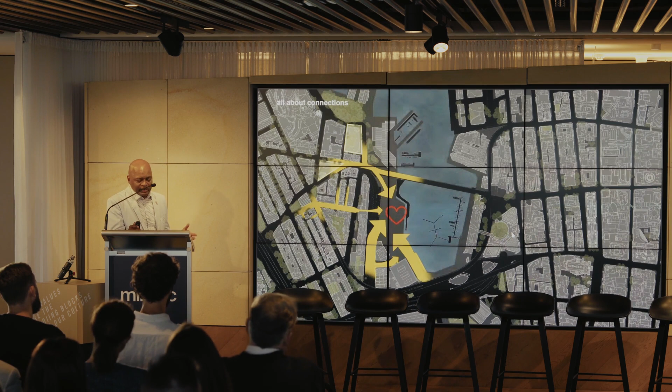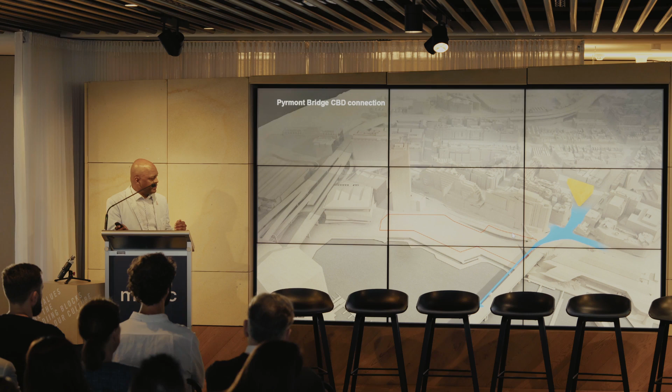In its contemporary setting, we think this is a place of great connection, facilitating various movements across the site. The proposed metro station will increase the amount of foot traffic across the bridge. It will also have a desired line across the site going towards the harbour. On top of that, you get a through-site link that will split the building into two.

We've used this network of design lines, view corridors, and pedestrian connections to carve, shape, and form the podium. This resulted in a series of interlocking floor plates that slipped in and out, which was a really good device to break down the mass of the massive podium.

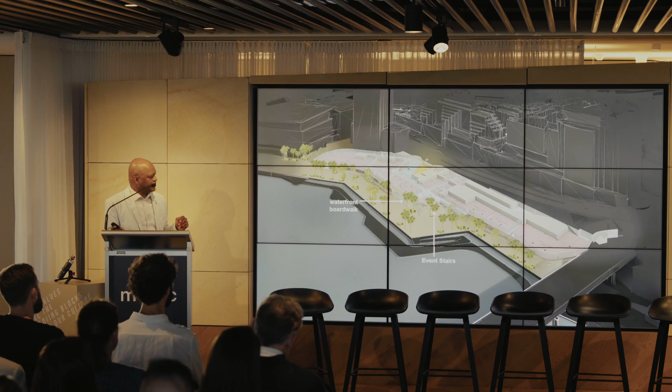The ground plane has a whole lot of F&B activities, a stage in the foreground, a campshed, and even a stair that took people up to it.

Guardian Square is the prime public space in the proposal. It engaged the Pyrmont Bridge to the west and flowed down gradually towards the event stair. It also linked this view of the Guardian Square with the F&B flanking the western side.

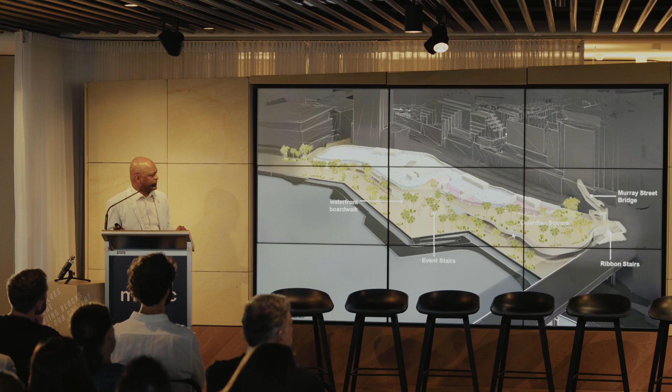So the Guardian Square is a prime public space. It's gently sloped towards the event stairs to the south, and it linked in with the Bunn Street connection and the through-site connection.

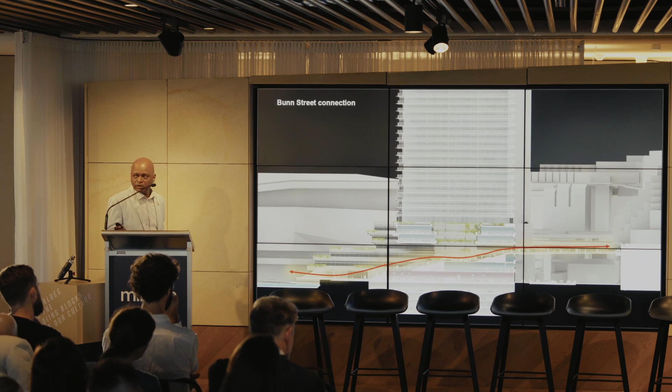The Bunn Street connection is dominated by quite a generous landscape stair itself. It's quite wide, almost like a people stair, bringing people from the high position back down to the water's edge.

So we have the through-site connection. It's almost like a third space - you're not part of the Guardian Square or the waterfront promenade, but you could hang out here. It also had a connection back to the lobbies of the commercial and apartment entities, with a large opening at the top that brought in a lot of daylight.

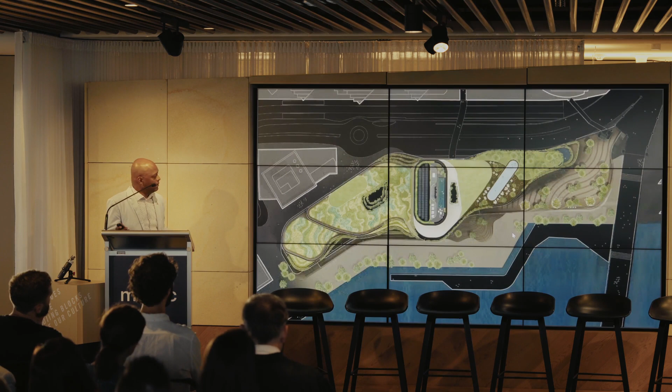The podium rooftops were landscaped with wetlands, and when you look down from above, it looked like a giant block painting.

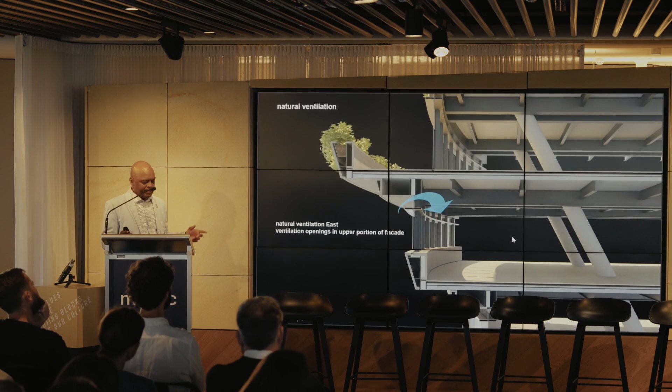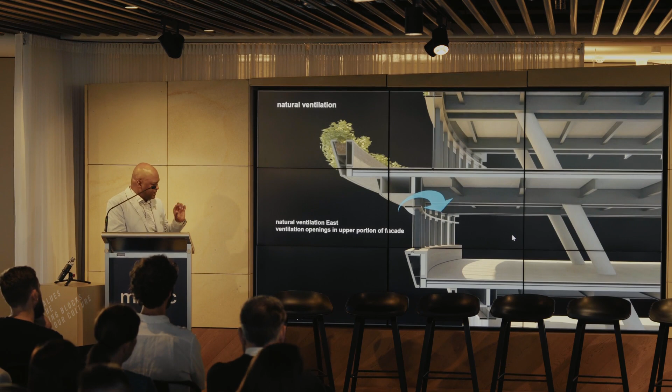The podium facade is very much about being an anti-CBD typology. We wanted it to feel like a landform, and solid sills create a really good, elegant horizontal articulation.

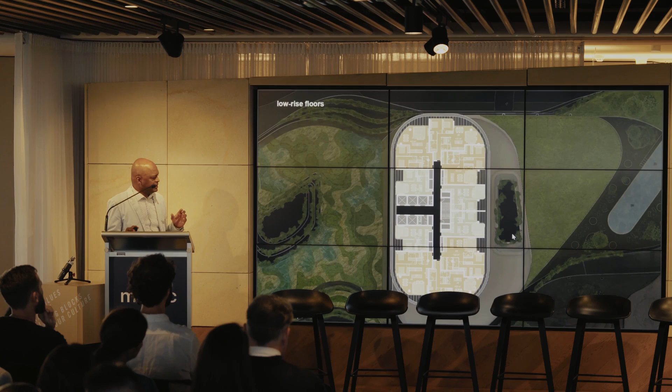View from inside out, and the tower itself - we were looking for an elegant and uniform tower, and we settled on a symmetrical floor plan with wraparound balconies and soft edges on the sides. The edges of the balconies projected out by 600mm to cater for PV cells.

Given the prime real estate is to the north, we pushed the core to the south, and as we went up, the lifts dropped and the area of the apartments increased.

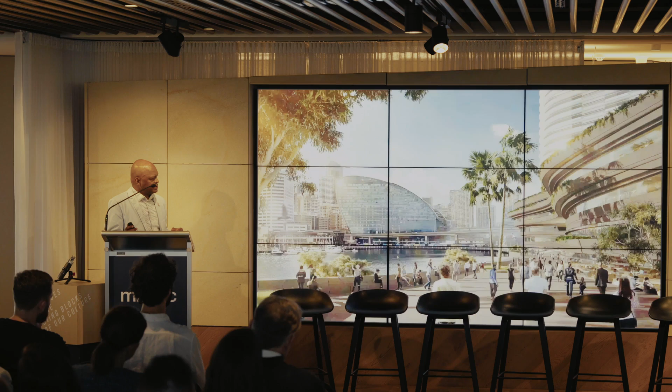And the top of it had a roof garden and a pool. I'll conclude the presentation with some of the renders that we did.

With a through cycle coming down from south to north, and from the bridge - I've seen that bridge before - and the last image of the tower shimmering in the skyline.

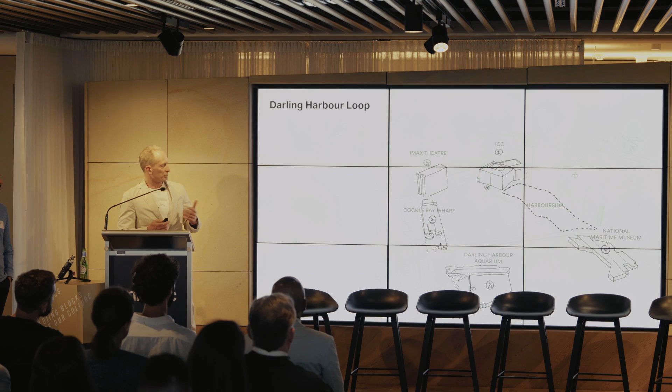I think the idea we explored was, can the site work for the community beyond its boundaries? What we investigated in terms of looking at the open space connections was that the Pyrmont side of the city is actually poorly provided in terms of accessible open space. So there's an opportunity here to reach beyond the site itself and make a public gesture, providing a set of parks and open spaces that knit and connect the site to the city.

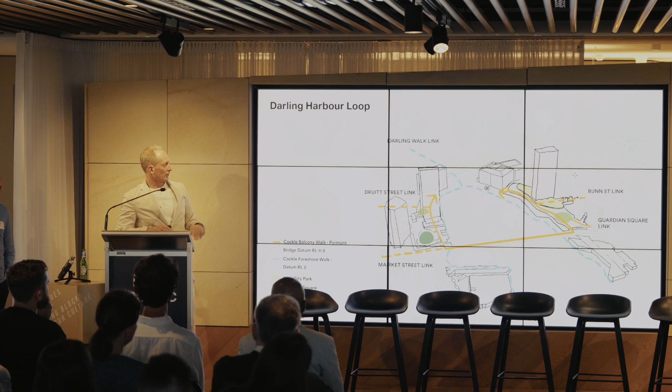One of the big urban framework gestures is quite simple: we already have a well-established ground level waterfront promenade connection, but by stitching the Cockle Bay project across Pyrmont Bridge and on top of the roof of the project, we're able to provide an upper level connection. So it complements the ground level pedestrian connection to Darling Walk. So there are two levels that you could experience Darling Harbour from, as an urban gesture.

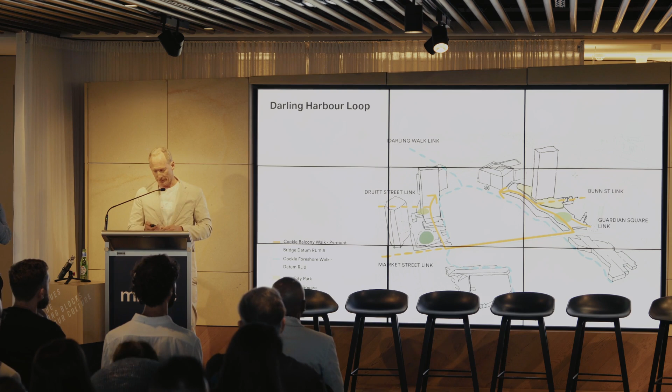The concept of the floating gardens was really a response between architecture and landscape architecture, to create a podium that was cut into a series of pieces. The pieces were cut to allow light and air into the podium, to break the bulk and create interesting moments that stitch the site back to the east and west. Interestingly, these levels as they change created this idea of floating gardens. So it was a very simple concept.

Then what we wanted to do was to knit the floating gardens so that one could walk from pedestrian level or a promenade all the way up over the roof and down the other side, making this incredible journey stitched into the site. And then the park itself was a series of floating gardens arranged to complement the ground level, if you like. Fred.

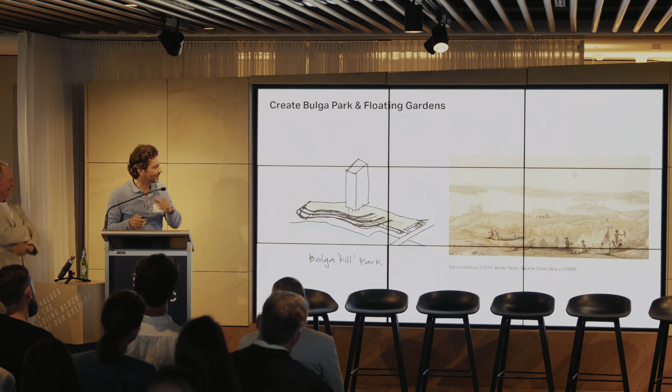Thanks, Adrian. Actually, Adrian, this is you again. Adrian took the concept discussion, but he said it better than I would have. So I think you're up again, Adrian.

What we wanted to do is recreate this bulga, the hill, using the gibber of country, and then stitch this wonderful journey that navigates all of the different floating garden levels. A very simple idea, if we all know about the 4 seasons in European culture, but the Aboriginal 6 seasons was the idea that underpinned the floating gardens.

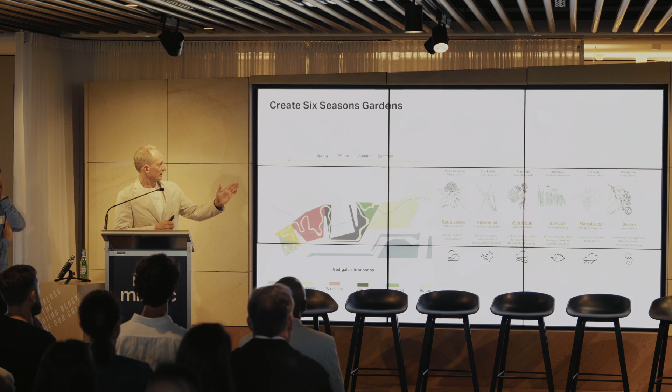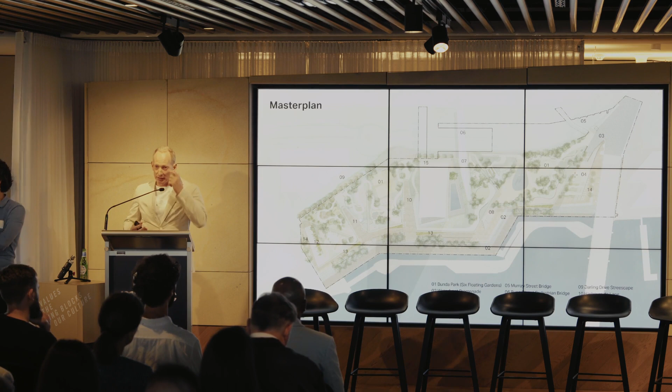They moved from summer, the northern part, which is receiving the most sun, all the way through autumn, winter and spring, picking up those gardens as they move across the roof. So we were able to create this wonderfully connected, publicly accessible set of bulga park and floating gardens that stitch the whole site together.

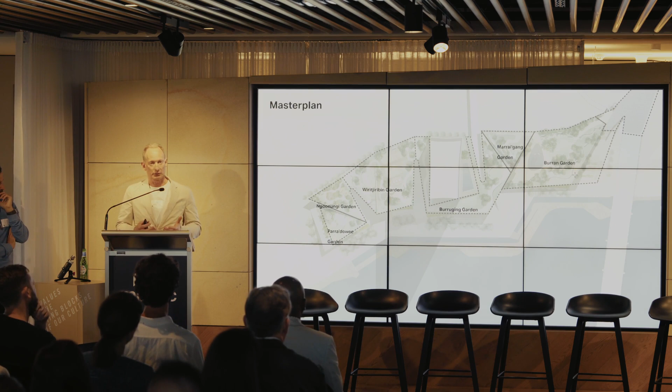Importantly, it's publicly accessible. Residents could still use facilities around the base of the tower, but there's a publicly accessible set of floating gardens that make a contribution to the city, into Pyrmont and beyond. So it's a very public and very wonderful set of propositions for the existing neighbourhood.

Fred. Adrian said it all, so I'm just going to go through this very quickly. I think we have 30 seconds. But well done, Adrian. As Adrian mentioned, we wanted to make it publicly accessible.

We felt there was a dearth of green space in the area. Of course, Cockle Bay is being developed by our good friends at Henning Larsen, and there's a green space. We're echoing that urban landscape in terms of accessible roof.

It was really important for us to break the scale of the overall building by having these indentations, which Adrian so eloquently said, allow daylight deep into what would be the office space.

We broke the facade into essentially 3 or 4 horizontal datums, which start to talk about the striation of the site, that have a vertical orientation to handle the low east and western sun. These indentations actually separate the office into manageable 1,000 to 1,200 square metre floor plates.

Through site link, as discussed previously, it was really important to make the site quite permeable, taking that public domain in and through rather than just water facing. All the lobby spaces were towards the west to help activate that edge.

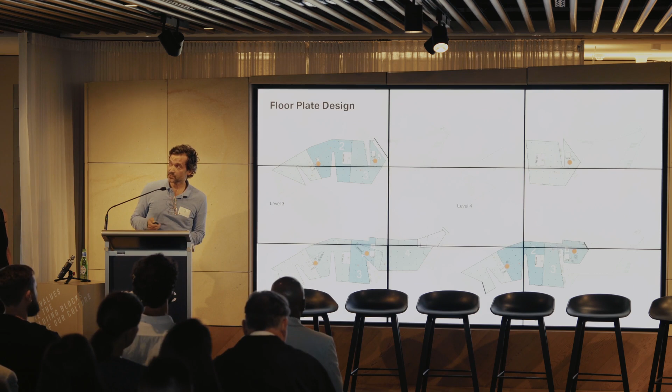Again, those indentations help us create these manageable office spaces to create a variety of potential anchor tenants. The indentations also help bring daylight deeper into this deep floor plate. And then of course, the options to have a loggia or an operable facade for covered outdoor terraces.

3XN, we always care about flow and program and how those two things mix. So the main entry arrival moment became very important, accessible from Guardian Square, that arrival moment where you're introduced to this green space and then taken out of that typical public realm.

So I think we're well and truly out of time, so just very quickly, extrusion. We started with the extrusion of the residential tower, moved the core towards the south, maximising the amount of light coming to each of those spaces.

Inherently in the apartment mix, we had a bit of a play articulated within the facade. We extended those floor plates 1.5 metres to try and maximise the available outdoor space. It's such a beautiful setting.

Articulated that with this waveform, sort of nodding to the peals of the podium, but also the setting that it's sitting within. It articulates each one of those apartment blocks, but it's also able to work within any apartment mix. So it's just creating that sort of play.

We pulled up the balustrade, that allowed us to block the westerly winds and sun, as well as maximise views out to the harbour. And that's how it plays out along the facade.

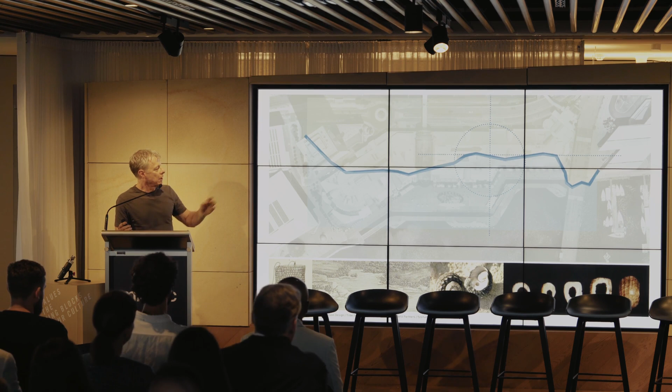In thinking about this site and casting our minds back to what it was before settlement, we realised there is the original shoreline, and perhaps the opportunity to interpret that edge and understand the reclamation of land, and in some ways create an experience of recollection.

We worked quite closely with Shannon and Martha on this idea, and you can see how that drops down into the shore and creates that sense of an edge and a strong landscaped presence. Part of that, of course, is the presence of the Port Jackson fig, the dominant tree.

This little section shows how that landscape flows down and is actually interpreted in this building that sits at that important junction, which you can see there.

It was a building conceived that we worked on quite closely with Shannon, that could free up the ground, but within it—and there's a lot of retail in this project—there could be First Nations focused exhibition, retail, food, design and produce.

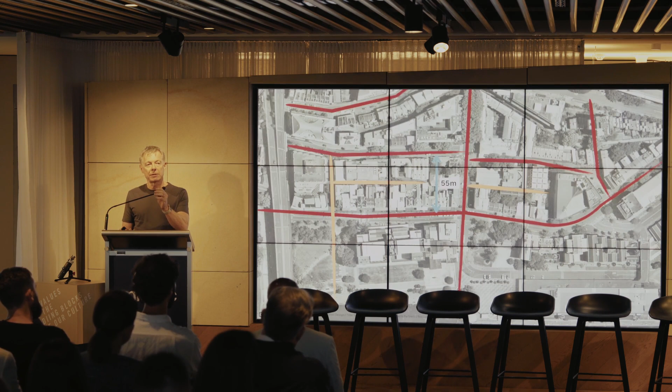But also in thinking about areas of intense waterfront redevelopment and Darling Harbour, there was a step back to think about how we structure the urban form at our waterfront.

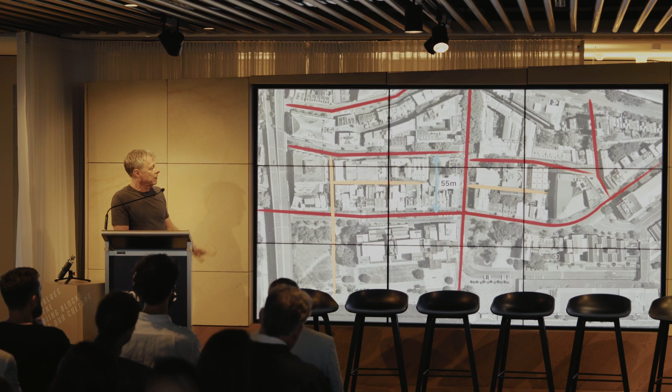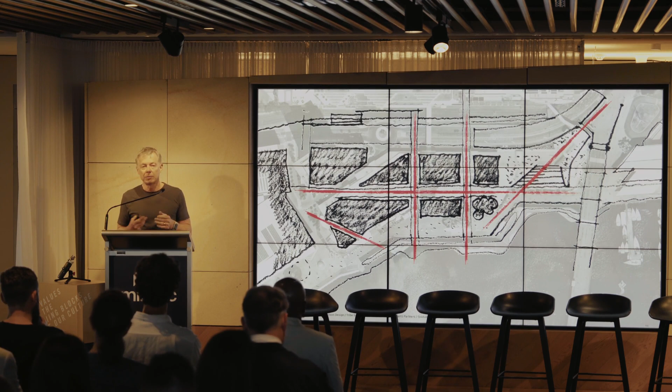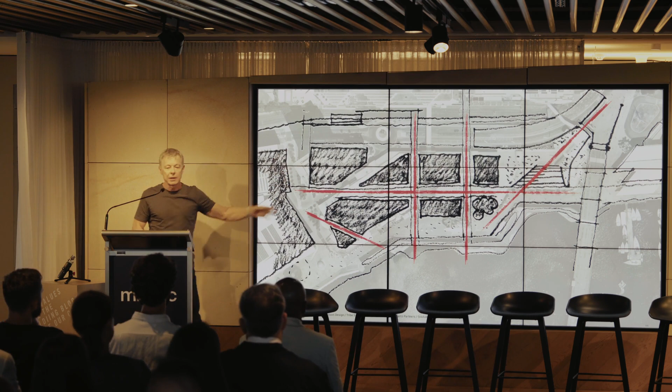To actually bring these different geometries through into public spaces that already exist, and to give a sense of the Pyrmont grain coming through to the shore.

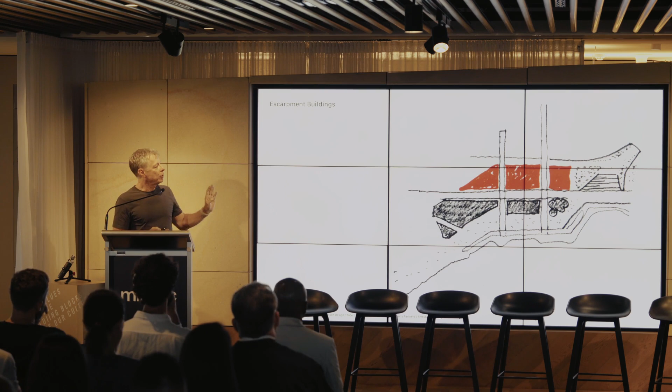So then the buildings to the west of that line, we conceived of as a kind of escarpment, that those podium buildings could be a reinterpretation of the sandstone escarpment.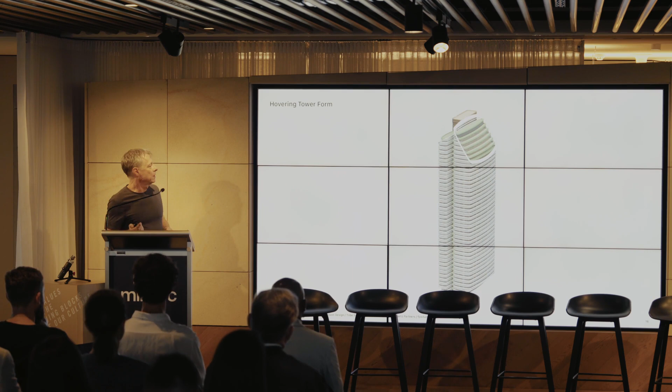And the tower then was conceived as something quite separate that could be conceptually floating above this platform. It's got a lot of really well designed apartments in it.

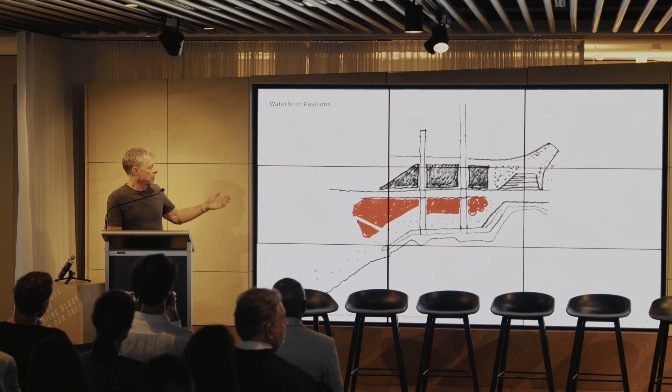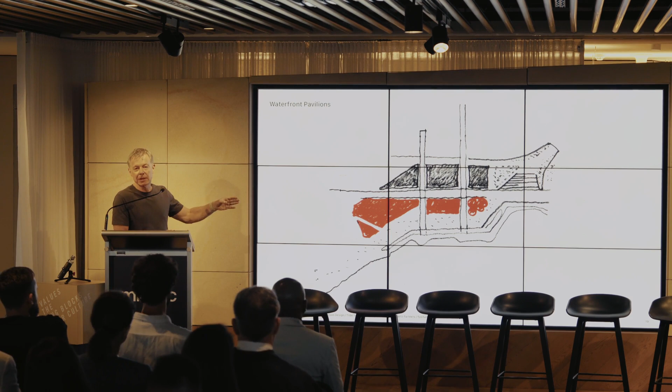Very rational core. And then when it came to the balance of the buildings that are less integrated in the tower, we thought that this should be the work of other architects—that will make a city like this, not just by ourselves, but with other designers. So we got in contact with some friends of ours, and each of them worked with us to design these buildings.

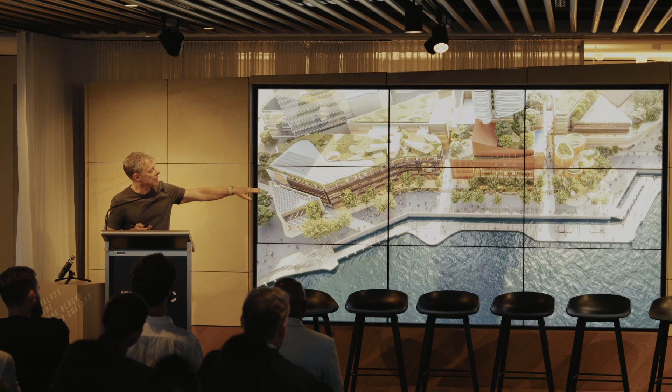Looking down, you can see that grain coming through, the integration of the landscape towards the north, and then a series of pavilion-like buildings that create that address and that presence on the major public space.

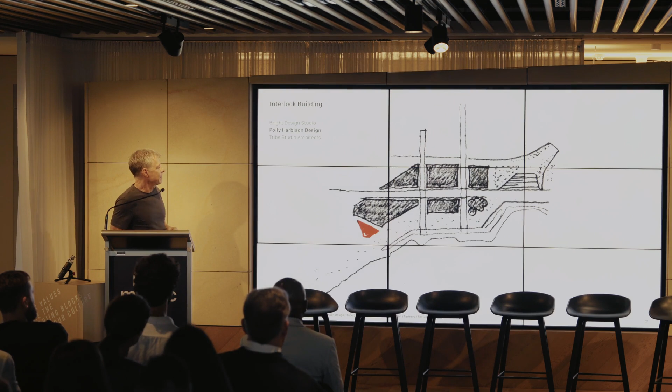So the first of those was designed by Polly Harbison, who's in the back there. It's a very beautiful building sitting at that really decisive corner as you come around and head north.

But it's a way of creating buildings which have a fine scale to them, a different character, and perhaps a warmer, more human character.

Continuous facade. A lot of attention to sun shading and layering amongst all of these designers.

And a beautiful building to be looking out at the waterfront.

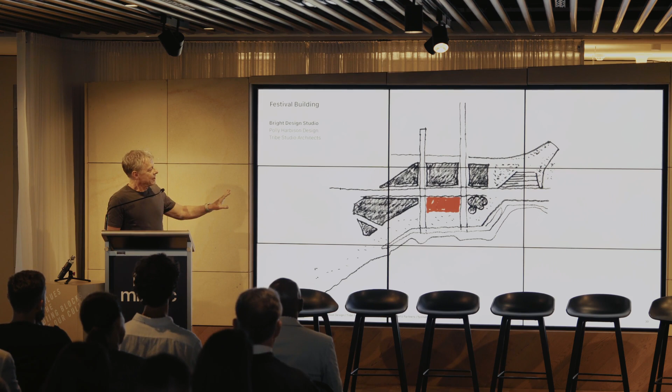And then finally, Mel's building, so I actually got someone from Melbourne up. That's a very decisive location between those two laneways.

This is a really lovely building, nice relationship between these buildings. Quite playful, use of really warm screen materials to deal with the low angle sun, and a really fine grain to the waterfront.

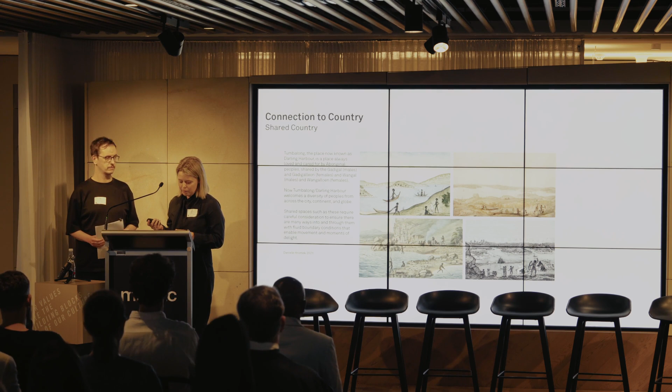The knowledge and information shared from Dinjama really fed into our concept and thinking. Our focus was to create a place rather than just a building—to instill public ownership and a sense of belonging into the site for everyone who would visit. We feel the idea and experience of place is felt most strongly through nature, so we wanted to look at what the site once had, be inspired by that landscape, and let it help us reimagine what the building could be. Through our response we wanted to connect the water and the sky, evoke the memory of a sandstone escarpment and green ridgeline, and importantly acknowledge Tumbalong as a place where seafood is found, particularly important for Aboriginal women who are experts of the marine environment through boating, fishing and craft. For us, this was really about seeing the place that was once there and celebrating that.

In terms of massing, there were 6 key moves that underpinned our urban design response and also conceptual response for the design. I'm not going to go through all these moves today, but I wanted to pick out just a couple in detail that are really important in our design response.

The singular connected landscape urban form really is a driving factor in our design response, as well as the erosion and connection back to this being a watery place, and as Matt talked about, an important place for women, particularly Indigenous women.

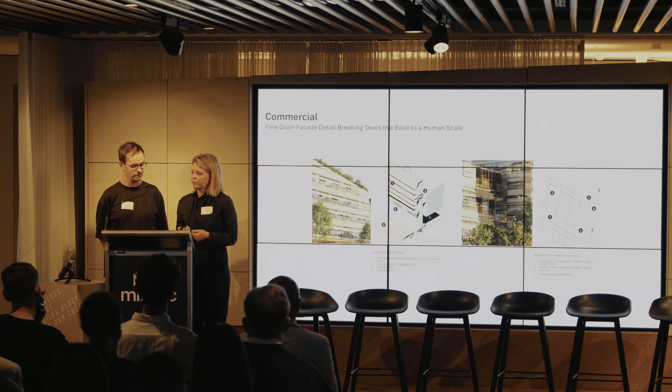Moving on to the tower expression, it really harks back to the Indigenous stories, and particularly this being an important place for the craft of women and the connection to that marine environment. So we wanted to bring the expression of the fishing net into the tower. The other move with the tower is that we were keen that it floats between that landform base and the celestial sky as well.

In terms of planning, we also have some beautiful apartments. Similar to many of the other schemes tonight, we had the core positioned on the south, and that liberated the north to some really fantastic high quality apartments that enjoy great views and light.

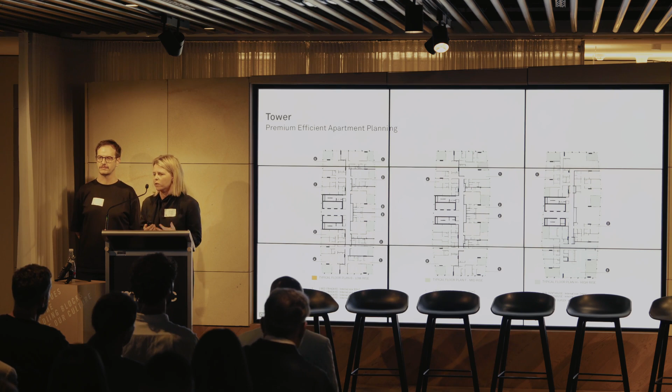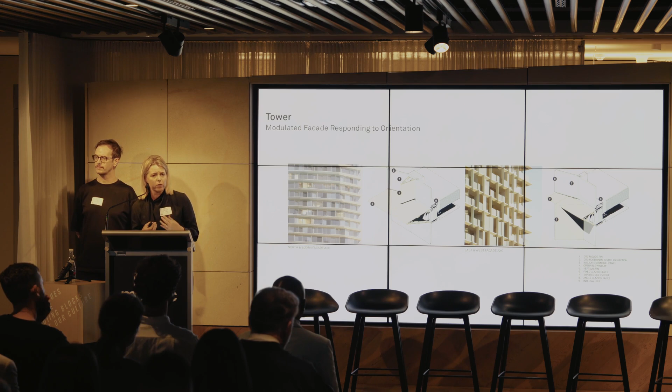Going back to the tower facade expression, it is this woven net, and a tactility and warmth was really important. But we also wanted to introduce some quite important pragmatic moves, so we have deep horizontals on the north and deep verticals on the east and west that provide that much needed solar protection. But we wanted a consistent expression around the tower, something with tactility and warmth, but wasn't just a simple glass box.

Lastly, before we move into images, because I know everyone's very keen to see some of the images that support the design proposal, we really wanted to make an emphasis or a point around sustainability. It isn't just an overlay, it is something that has driven almost every single decision on the project and continues to drive key decisions. It is really about creating a resilient and regenerative place.

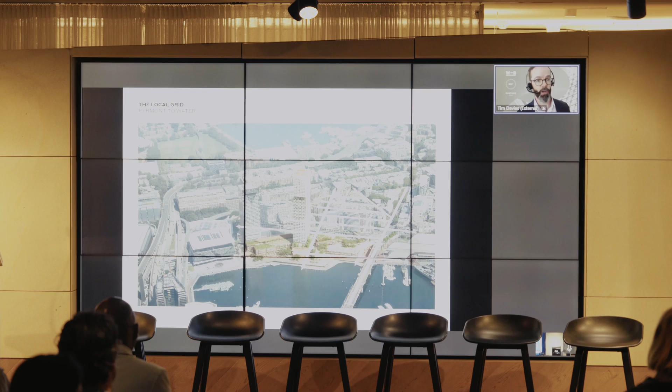We started the process by studying and analysing the existing context of Pyrmont, as we've heard all the other competitors did. The urban grain aligned to Pyrmont Bridge and Union Street drove the set out of the northern element of the proposal. And the Pyrmont grid, running from the ancient ridgeline to the harbour, directly informed the rest of the development grain. This grid shift across the block enhanced the waterfront connections.

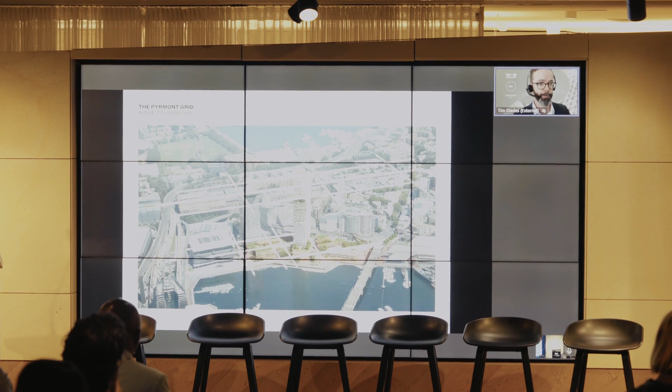And where these two urban grids intersected, we created specific nodal points that reference natural geological forms. At certain moments, the nodes became meeting places supporting social interactions, and at other nodes, skylights bring daylight into the heart of this huge ground scraper which forms the office precinct.

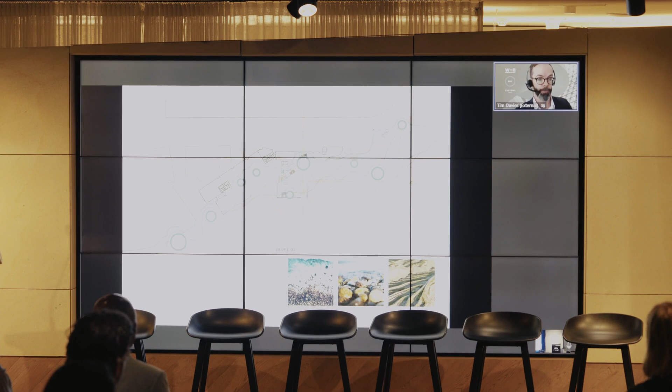The site itself is built on reclaimed land over a number of stages, and we mapped the original shoreline from historical records to finalise the positions of those nodes, as a reference back to the original land prior to the Industrial Revolution. And the shoreline itself determined the materiality of the precinct.

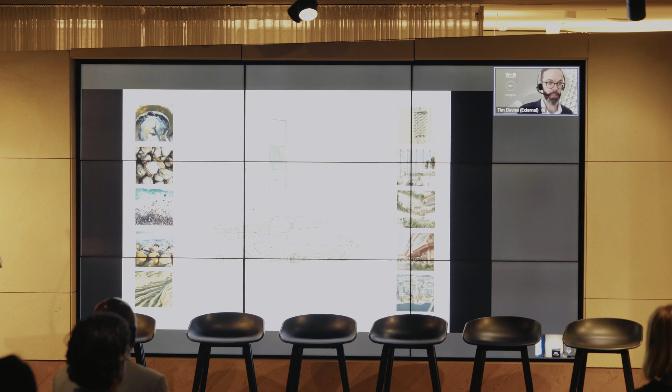So at the lower levels we had the earthy base of the building, linking the mud, the sand and harbour, giving way to the lighter tones of the shells on the site, with cuts in the massing of the tower revealed with pearlescent finishes reminiscent of the inside of a shell.

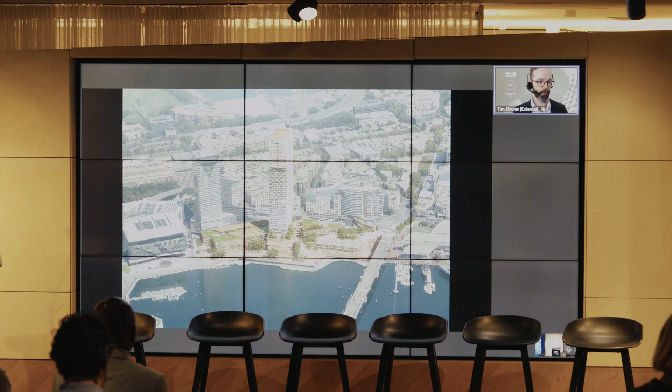And the overall view here, you can see where the ground form really locks into the existing network around the site. And as we just talked about in the Q&A, that shrink-wrapped envelope was obviously quite a strong constraint, but really locking into those existing levels.

The experience of the place was equally paramount to our approach. How can we support the users of this new development to create their own stories and history? This was something that underpinned all of our design thinking and our partners through the project.

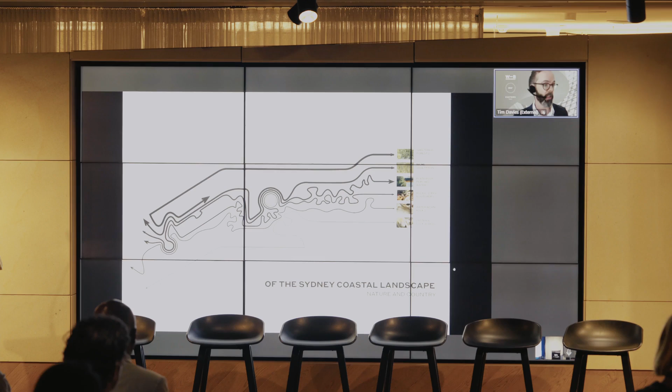It comprised a multi-layered approach inspired by that unique coastal landscape of Sydney: the oyster and cockle beds at its base, rocky cliffs in the middle, and then leading up to a kind of sheltered forest on top of the podium. And within the heart of the centre of the project, we created an eddy.

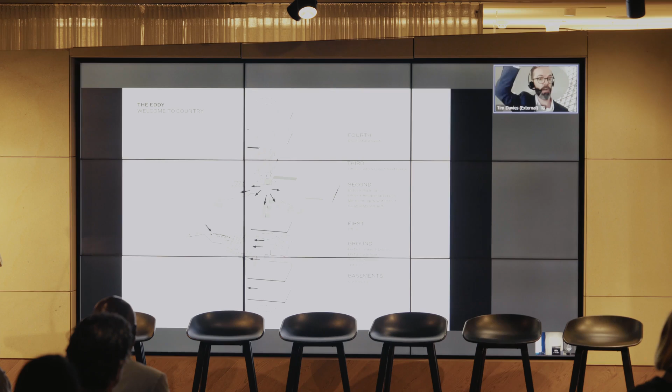That was our nickname for this three-dimensional space that vertically connects from the basement parking to the gardens of the residential tower above. It really acts as this central attractor, aiding wayfinding, whilst physically and deliberately mixing the different occupants of the retail, the workplace, the residences, along with the casual visitor. So it became this place for everyone to come together in the heart of the scheme.

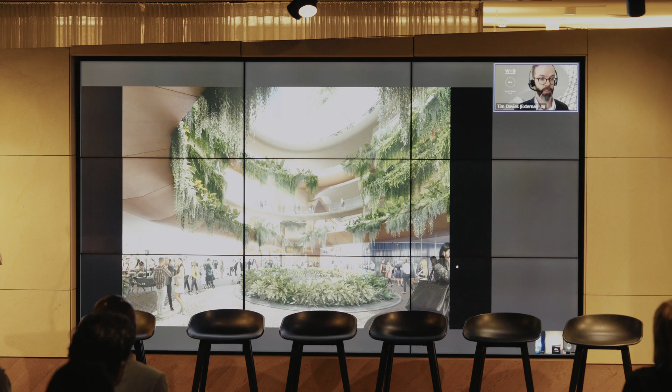And connecting the landing of Pyrmont Bridge on the right-hand side of the image to the eddy in the centre is a new generous public ground, Guardian Square, which was a key part of the brief.

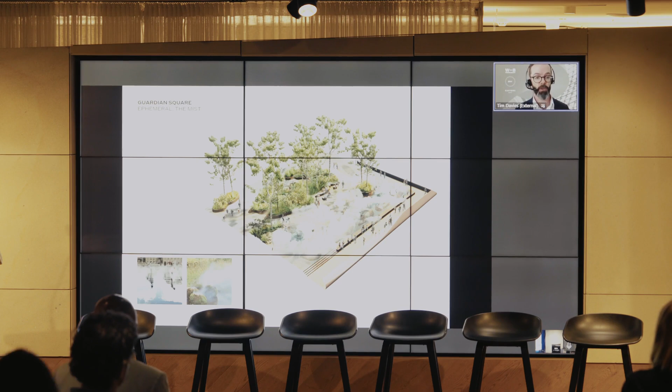The square is fully public and has the ability to morph between different modes, from a plateau or perched water, to event mode where the usable space can dramatically increase, to art mode where it transforms into an ephemeral installation, shifting with seasonal changes, with its landscape and material palette being deliberately tactile and full of native species.

The workplace, as you see in some of the other competition entries, different architects have taken different approaches. We went with a ground scraper approach from level 1 to 4 to create significant floor plates. The largest floor plate on level 1 is over 9,000 square meters of net area. Effectively, we imagine this as a kind of campus on water.

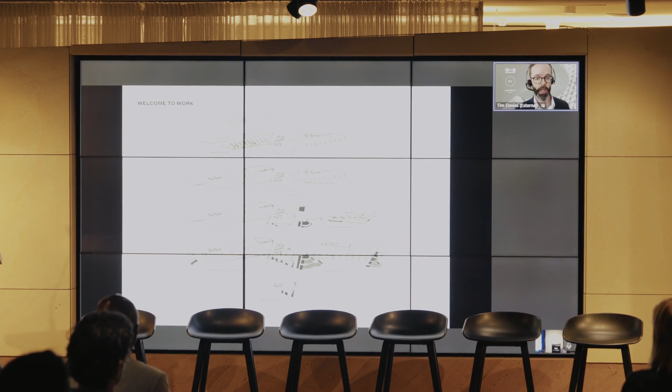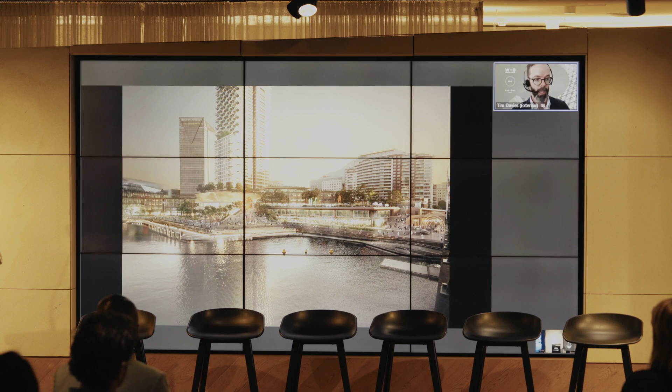A single tenant could take over the entire floor plate, or you could subdivide into smaller tenants. In the visual, you can see that ground plane being dedicated to a series of retail and restaurants, activating and linking the promenade with the public, and the workplace hovering above.

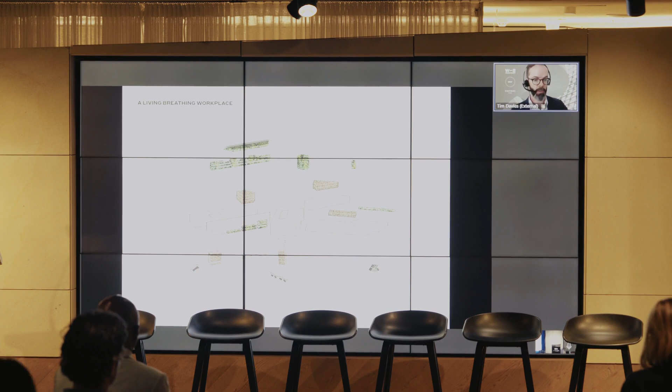The concept around the workplace is to create a living, breathing building, where every tenant has access to nature, fresh air, and is mixed mode ready. The floor plates are a simple structural framing system that can be hacked and adapted to suit tenant demands over time, with multiple entries creating dedicated lobbies for anchor tenants.

The Green Gorge is our nickname for the verdant landscape route, which connects up from the promenade at the south all the way up to the eddy on level 2, with the greenery and planting acting as a natural filter to the workplace behind.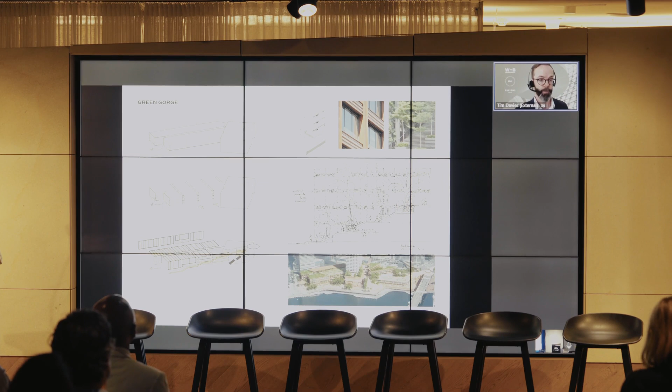Floor plate depths have been tailored to allow natural lighting, with a central green spine running the entire length to promote that connection to nature, enhancing physical and mental wellness.

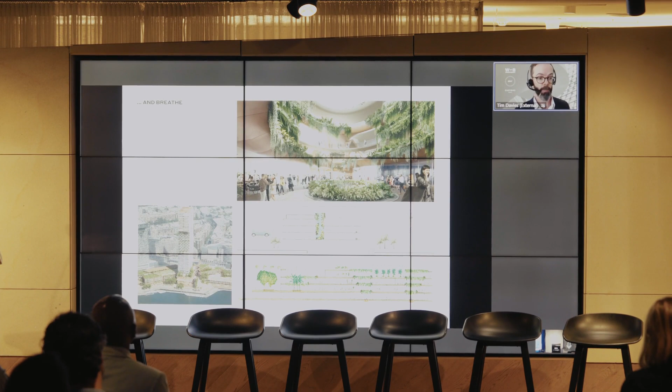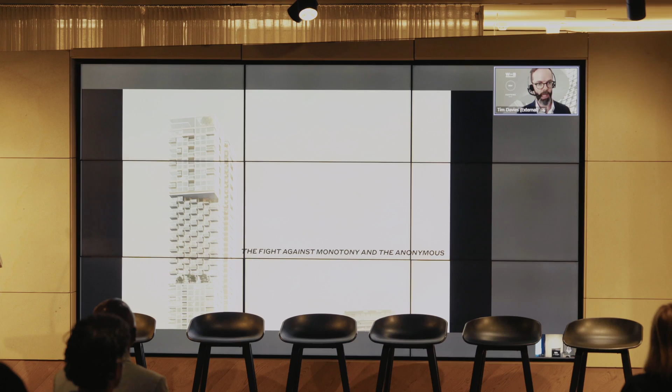And then moving up to the tower itself. It had quite a constrained envelope that we all had to work within. We deliberately broke it down into a series of smaller elements and blocks by height, orientation, and apartment type to allow everyone to identify with their home.

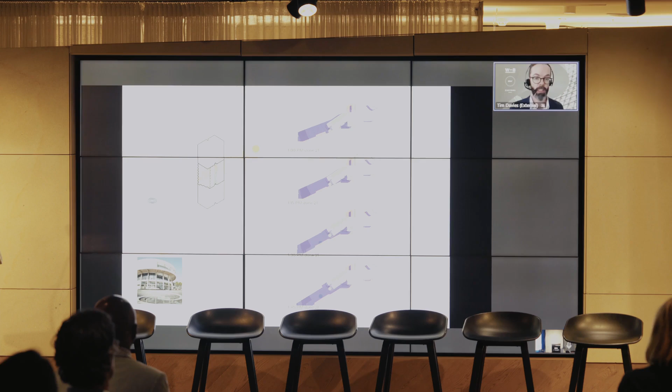A key requirement of the brief was to protect the solar and wind access to the Woodward fountain. We responded via a dramatic cut into the massing of the tower, which increased the amount of sunlight to the fountain and the public realm, particularly over the lunchtime period.

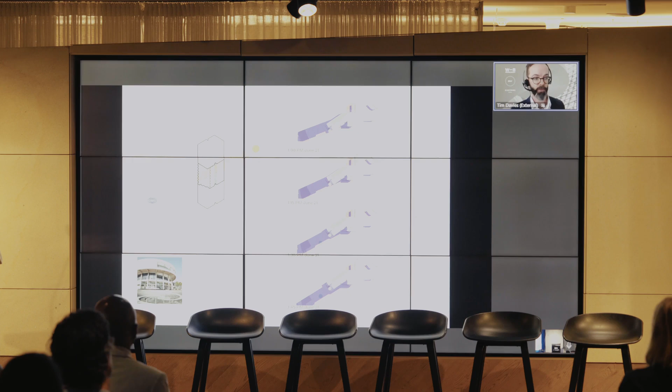Obviously, much to the delight of the structural engineers, with our significant cantilever. Here you can see that cantilever and the dynamics of that tower form as you move across the space from the ground floor level.

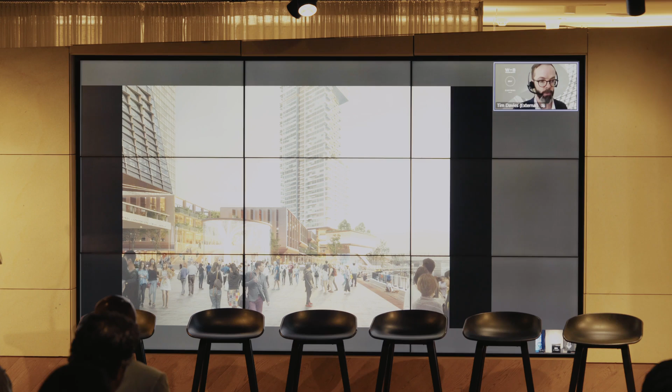The tower reads as a crystalline form, revealed by the shifting tides of the harbour and set above the earth, rock and eroded form of the podium. Glazed ceramic faience is proposed as an interpretation of the shells and cockles on site.

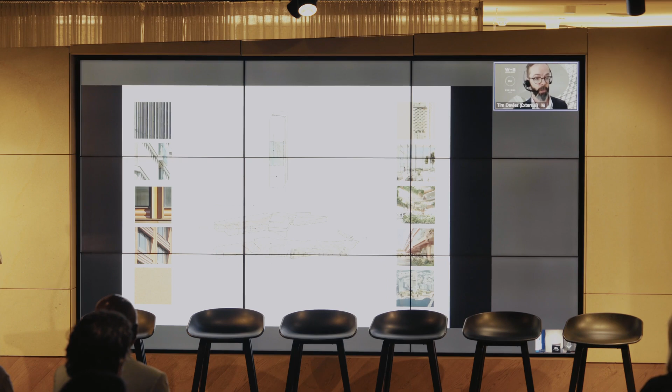From Dunn Street on the Pyrmont side, the base of the tower is further eroded to respond to prevailing datums of the neighbouring context. The mid-level wood cut forms a pixelated facade of protected balconies for each resident, protecting from wind and noise.

Each balcony was imagined as almost like a terrarium, so that each resident could customise all of their garden settings, creating a piece of nature elevated within the sky.

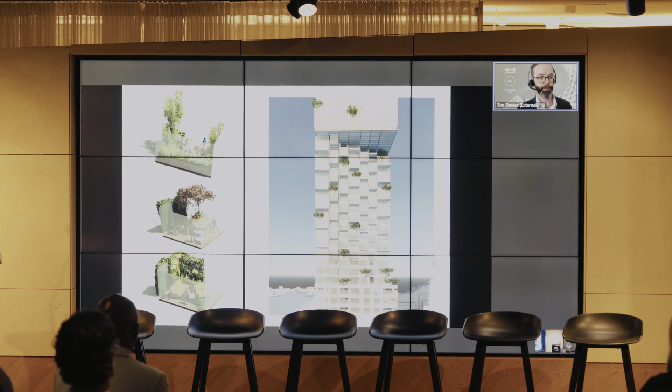The primary facades of the tower are configured with a variety of components, responding to the function of the room behind, from integrated window seats, clear portals, to expansive panoramic windows to capture the views out.

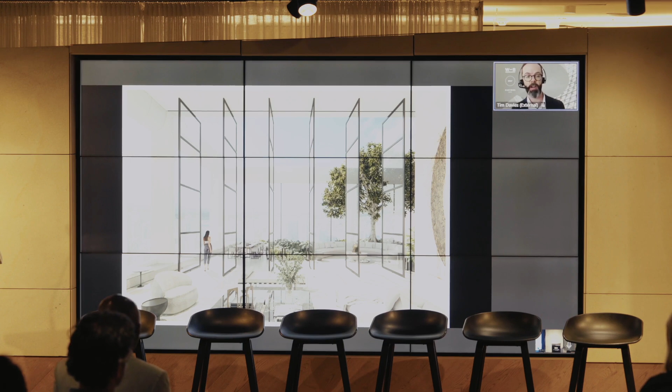At the crown of the building, we propose an incredible set of penthouses, each with their own character and connection back to nature. And I'll wrap up there on our final slide. Thanks again to everyone involved in the project, all our partners, and to Mirvac.